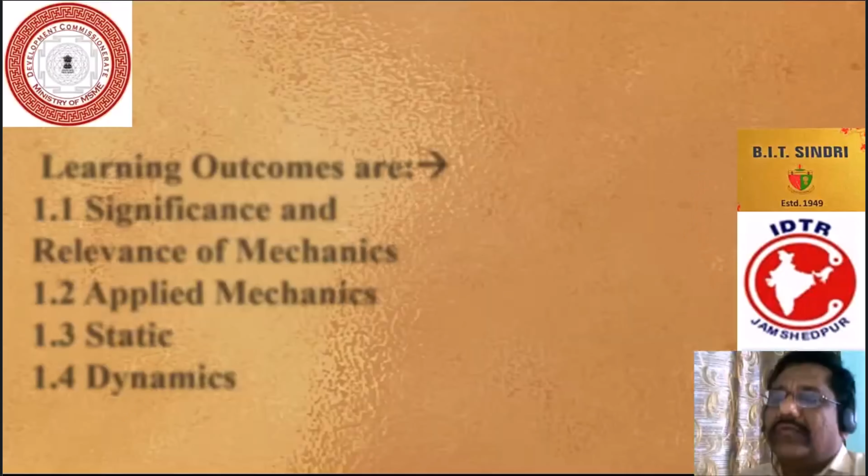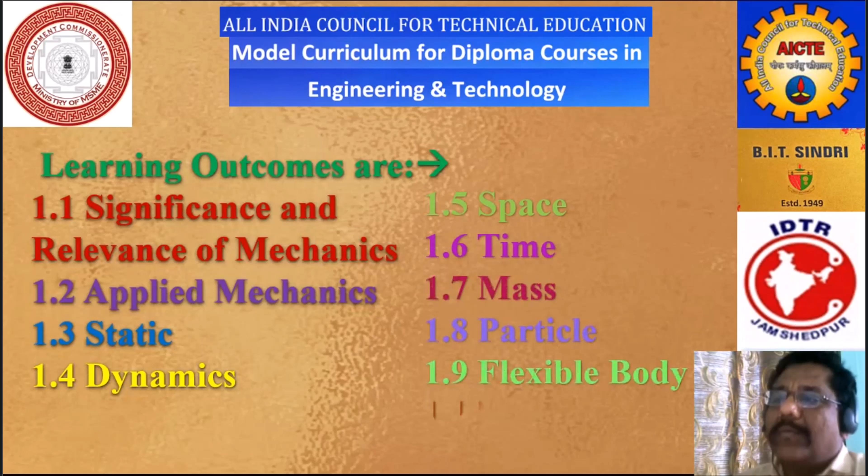The learning outcomes are significance and relevance of mechanics, applied mechanics, statics, dynamics, space, time, mass, particle, flexible body and rigid body. In these sections I will briefly discuss unit 1, basics of mechanics and force system.

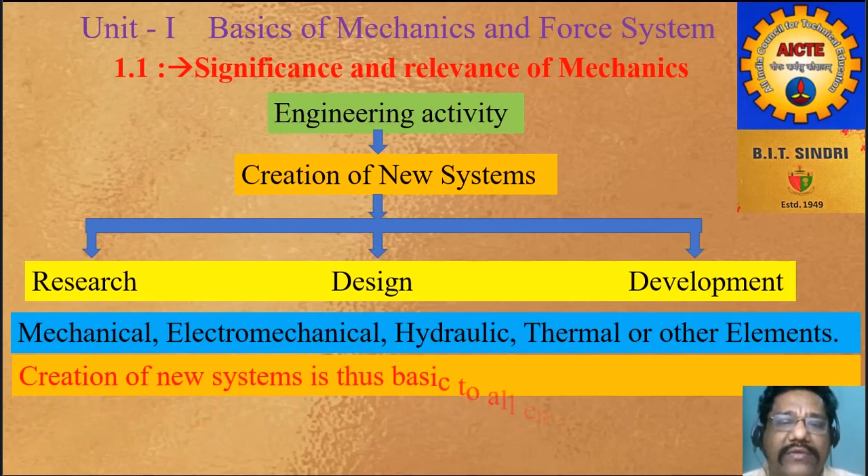The first topic is significance and relevance of mechanics. Engineering is an activity concerned with the creation of new systems for the benefit of mankind. The process of creativity proceeds by way of research, design and development. New systems emerge from innovation, and a system may be constituted by mechanical, electromechanical, hydraulic, thermal and other elements. Creation of new systems is thus basic to all engineering.

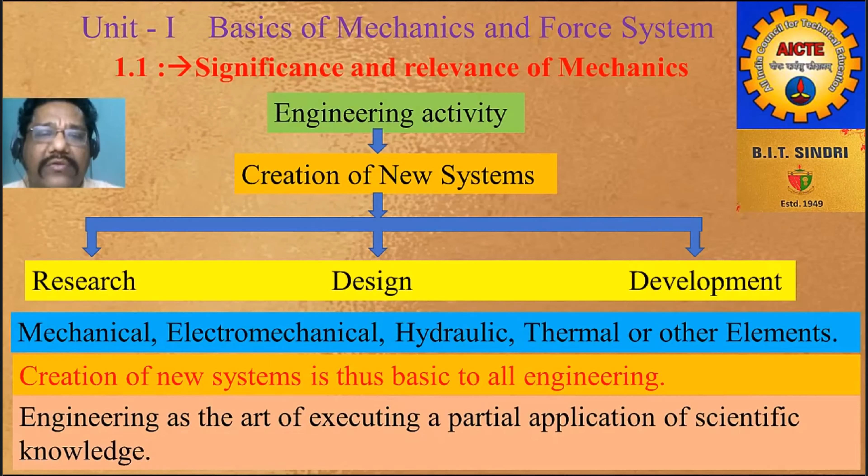The Living Webster Encyclopedic Dictionary defines engineering as the art of executing a practical application of scientific knowledge. It is important to understand the difference between engineering and science. Science is concerned with systematic understanding and gathering of facts, laws and principles governing natural phenomena. Engineering, on the other hand, is the art of utilizing established facts, laws and principles to create certain desired phenomena, as shown in figure 1.1.

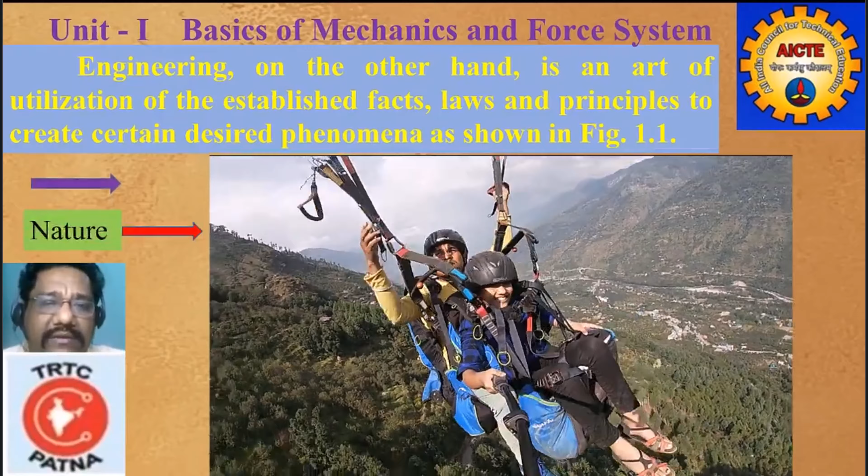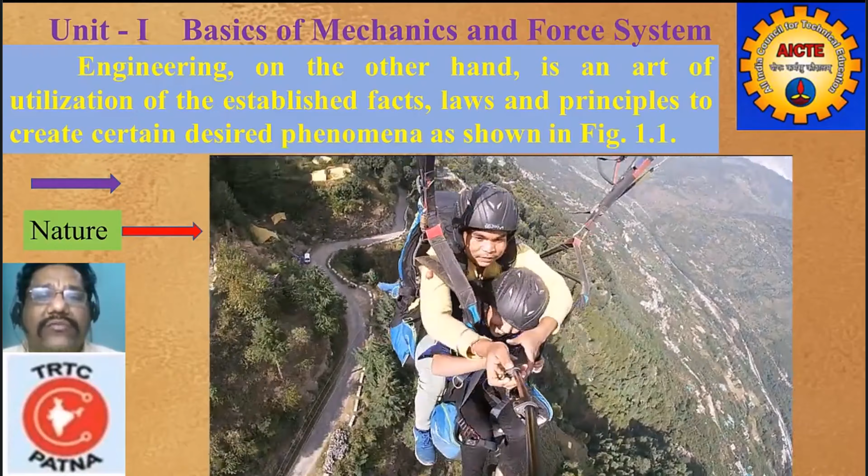So here is the role of engineering mechanics in nature. Now let's discuss the first point: what is nature? In some societies, there is no concept of nature, nor any concept of what is not nature. So whether in culture or society of humans, why do we need a concept of nature? When we grow a crop, do we deal with nature or something that is not nature?

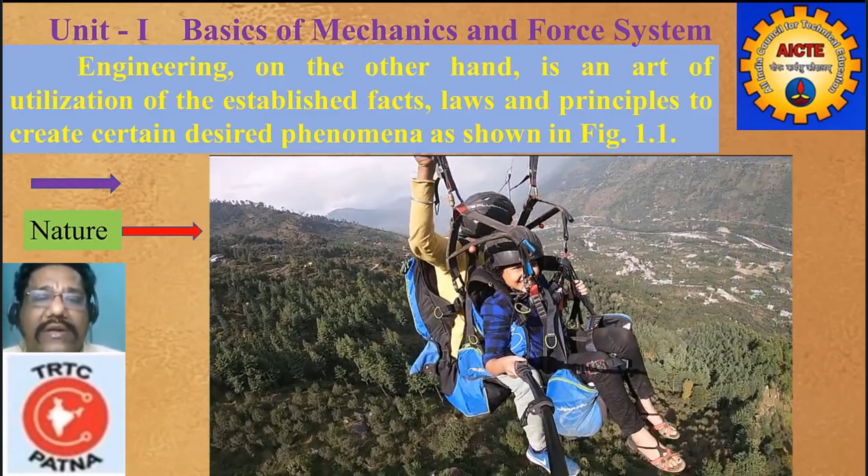Everything we do every day is a mixture of things that our school teachers told us are supposed to be separate. Our school teachers told us that behind all the different things human beings do, there is an unchanging background consisting of things like atoms, genes, and energy.

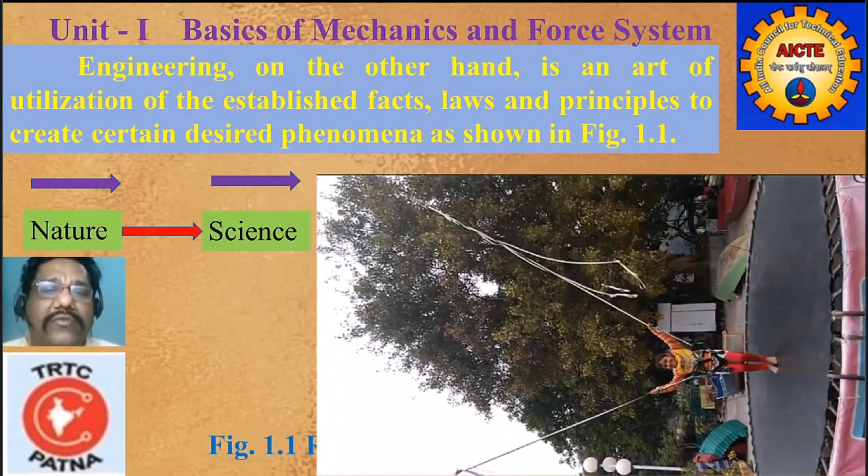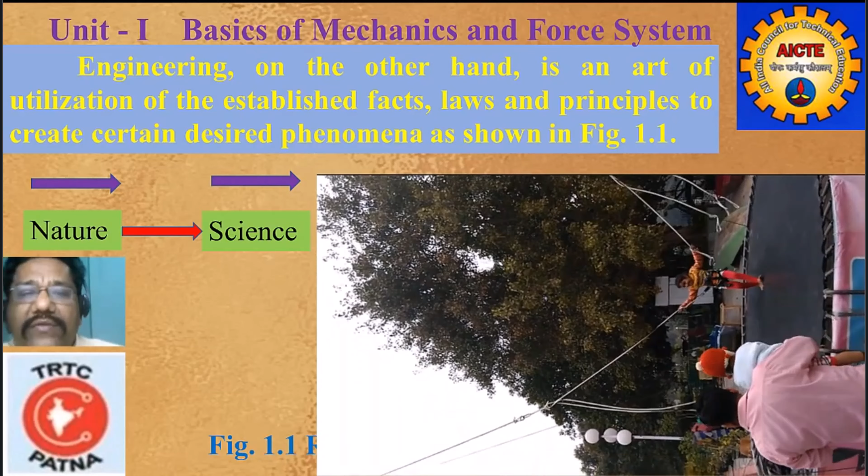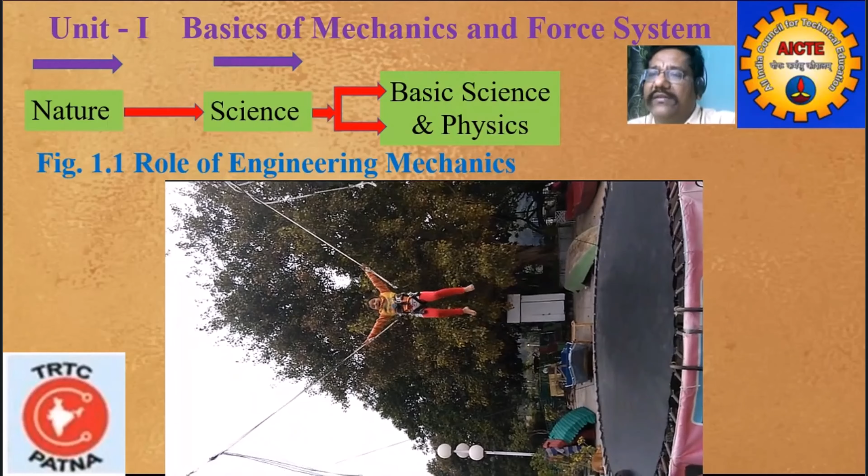Next is basic science and physics. Basic sciences are defined as the scientific disciplines of mathematics, physics, chemistry and biology. They are called basic sciences because they provide a fundamental understanding of natural phenomena and the processes by which natural resources transform. Physics is a natural science that deals with matter and energy and interactions of matter with one another. It also deals with all physical processes and phenomena of a particular system.

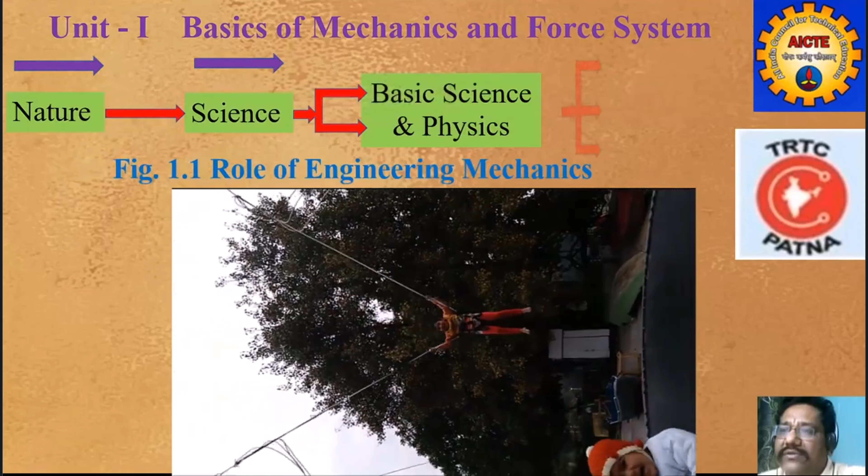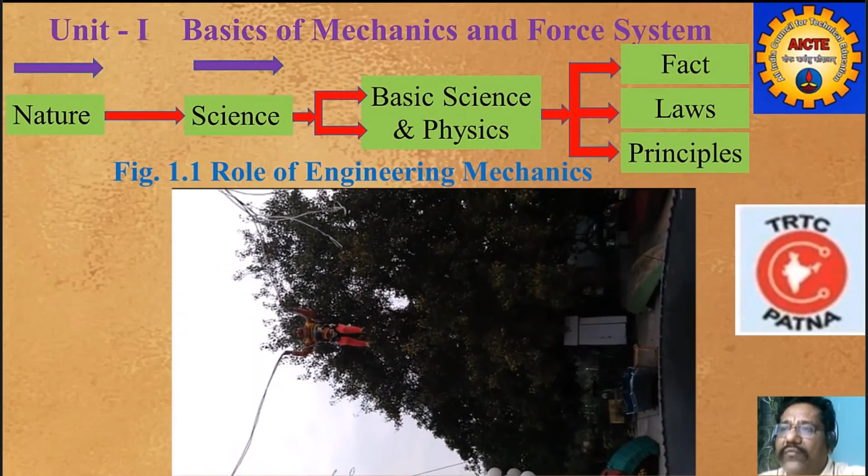Next is facts, laws and principles. What are facts? A fact in science is an observation that has been repeatedly confirmed and for all practical purposes is accepted as true. Truth in science, however, is never final, and what is accepted as a fact today may be modified or even discarded tomorrow. Laws are descriptive generalizations about how some aspect of the natural world behaves under stated circumstances.

Various laws you already studied in the school period, like Newton's laws of motion, law of conservation of energy, Hooke's law, etc. Now come to principles. Principles are ideas based on scientific rules and laws that are generally accepted by scientists. They are fundamental truths that are the foundation for other studies. They are more like guiding ideas that scientists use to make predictions and develop new laws. Various principles you already studied in the schooling period, like the equivalence principle, Archimedes' principle, etc.

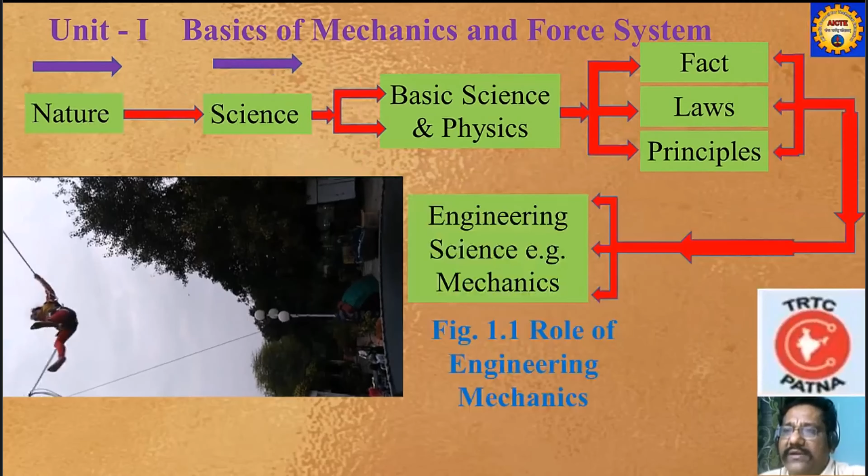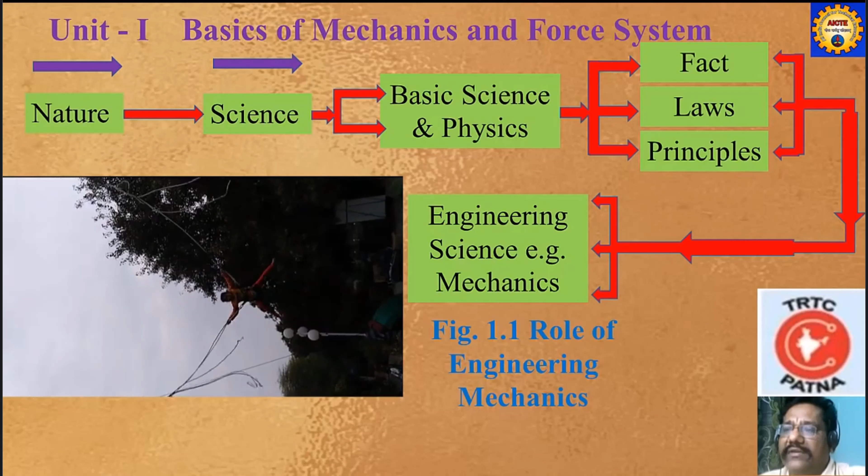The next term is engineering science, that is mechanics. Engineering science, mechanics, is a broad discipline that encompasses many different scientific principles and associated mathematics that underlie engineering. Mechanics is the study of forces that act on a body and the resultant motions that those bodies experience. So basically, you have to study the present-day form of engineering mechanics.

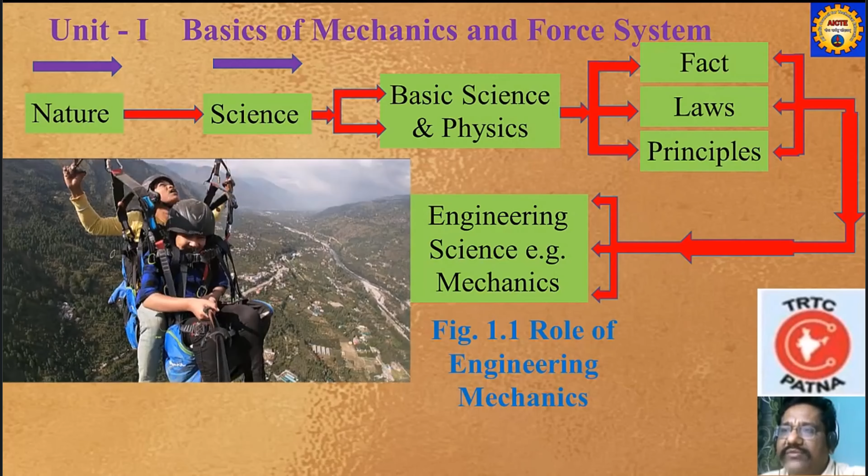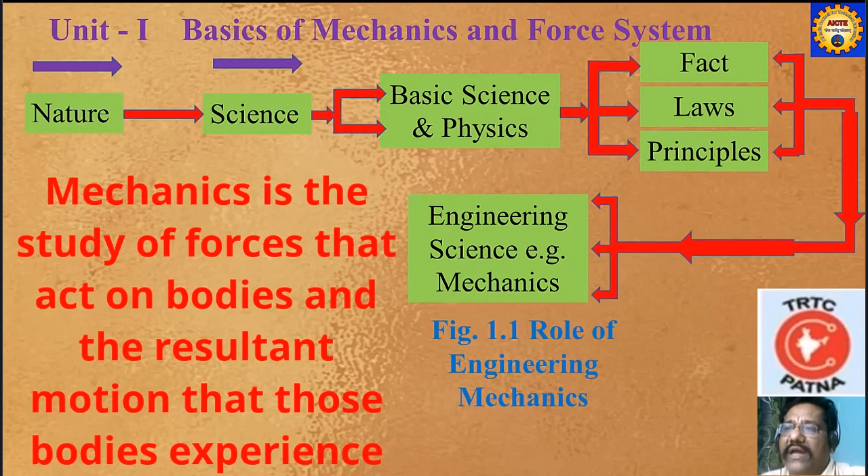So I will explain here what is engineering mechanics. Engineering mechanics is the study of forces that act on bodies and the resultant motions that those bodies experience.

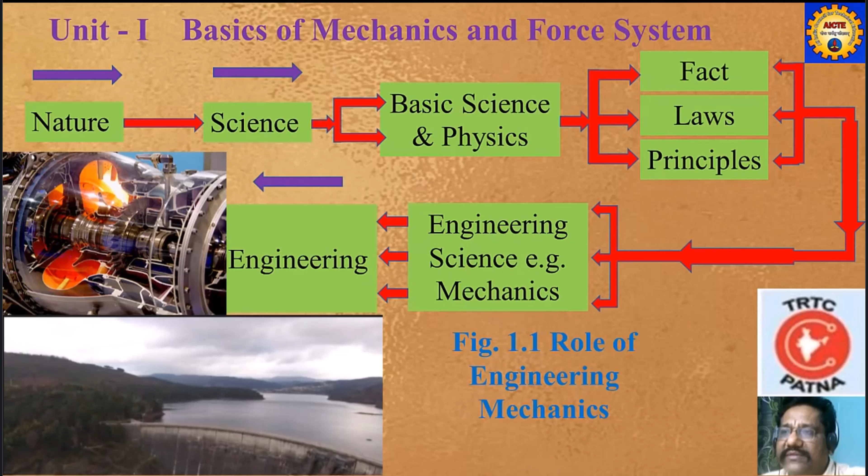The next term is engineering. Engineering is the use of scientific principles to design and build machines, structures and other items, including bridges, tunnels, roads, vehicles and buildings. The discipline of engineering encompasses a broad range of more specialized fields of engineering, each with a more specific emphasis on a particular area of applied mathematics, applied science and type of application.

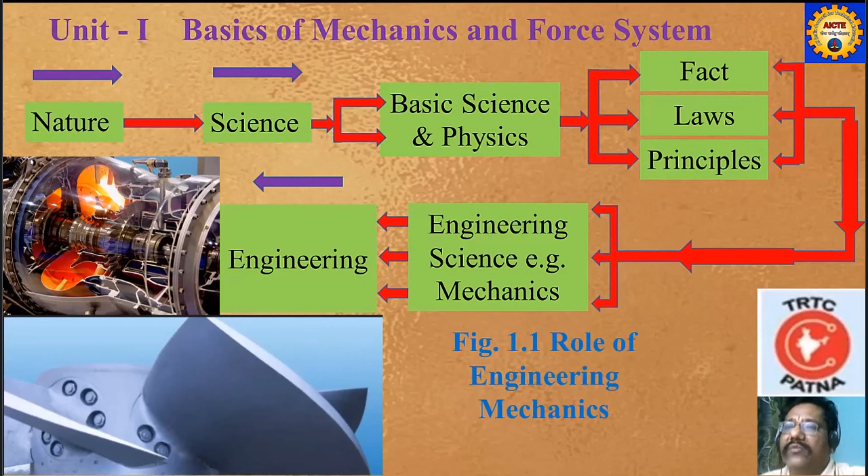So the role of engineering mechanics is: nature, then science, then basic science and physics, facts, laws, principles, engineering science and mechanics, engineering, and then after that, the new features developed here, the new systems.

The activities of science and engineering are thus mutually opposite. Both may proceed through similar ways and means of analysis and synthesis, but are oppositely directed. The training of scientists and engineers should be correspondingly designed for their respective objectives. The set of courses meant for engineering students is called engineering sciences. These are essentially basic sciences classified and labeled especially for engineering students with regard to their future responsibility. The existing laws and principles are conveyed to the students by the engineering mechanics course, with emphasis laid on their application to real life problems.

So mechanics is the physical science concerned with the dynamical behavior of material bodies in the presence of mechanical disturbance.

Since such behavior is of interest to mechanical, civil, electrical, chemical, aeronautical, textile, metallurgical, mechatronics and mining engineers, it is appropriate to conclude that the subject of mechanics lies at the core of all engineering analysis.

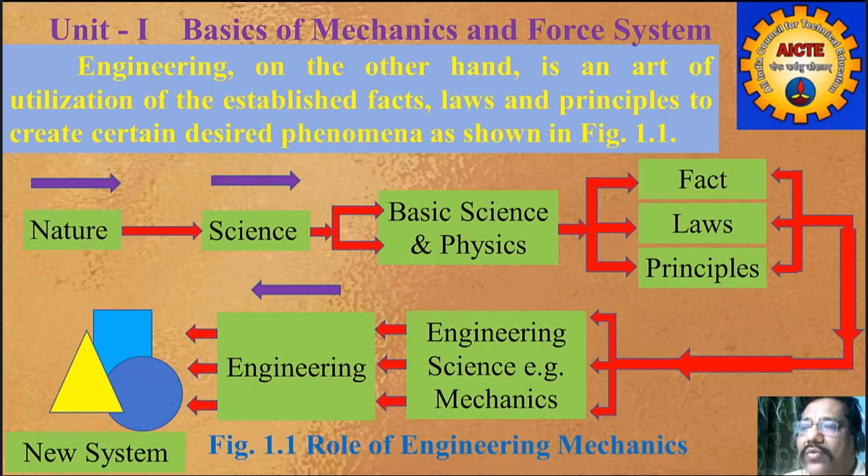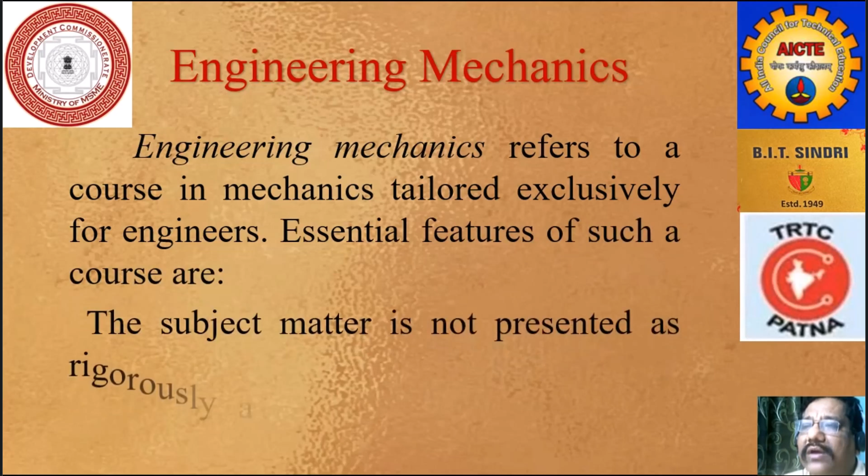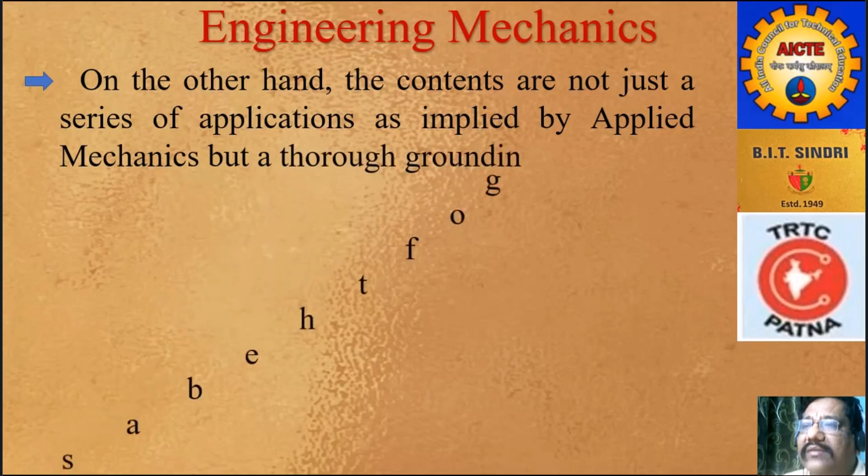Engineering mechanics refers to a course in mechanics tailored exclusively for engineers. Essential features for such a course: the subject matter is not presented as rigorously as analytical or axiomatic mechanics may demand. On the other hand, the contents are not just a series of applications as implied by applied mechanics, but a thorough grounding of the basic principles together with engineering application.

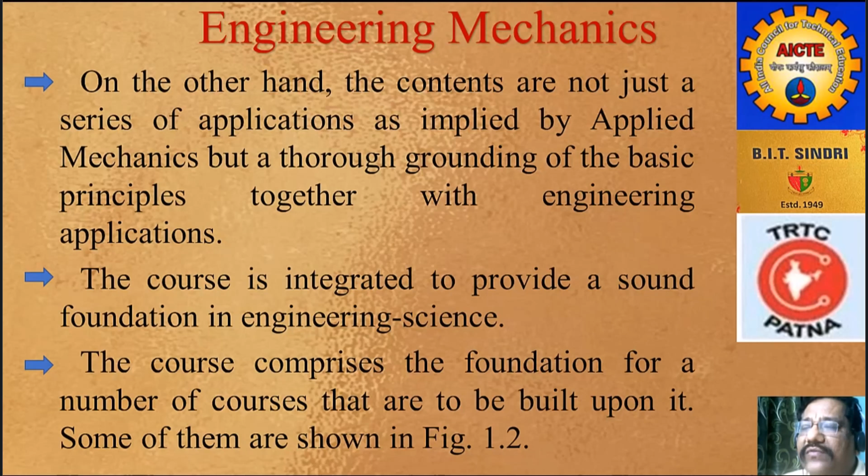The course is integrated to provide a sound foundation in engineering science. It comprises the foundations for a number of courses built upon it. Some of them are shown in figure 1.2. So here, mechanics is the foundation of a number of courses.

The foundation of engineering mechanics includes laws and principles, engineering, fluid mechanics, continuum mechanics, mechanics of solids, ideal fluids, viscous fluids, compressible flows, aeromechanics, viscoelastic fluid, mechanics of deformable bodies, particle mechanics, rigid body dynamics, and rigid body statics.

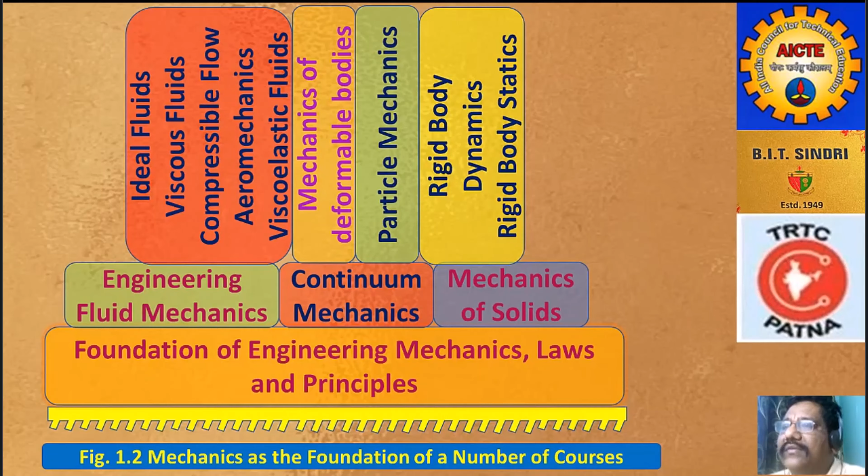After the completion of significance and relevance of mechanics, the next topic is applied mechanics. Applied mechanics is the branch of science concerned with the motion of any substances that can be experienced or perceived by humans without the help of instruments. In short, when mechanics concepts surpass being theoretical and are applied and executed, general mechanics becomes applied mechanics.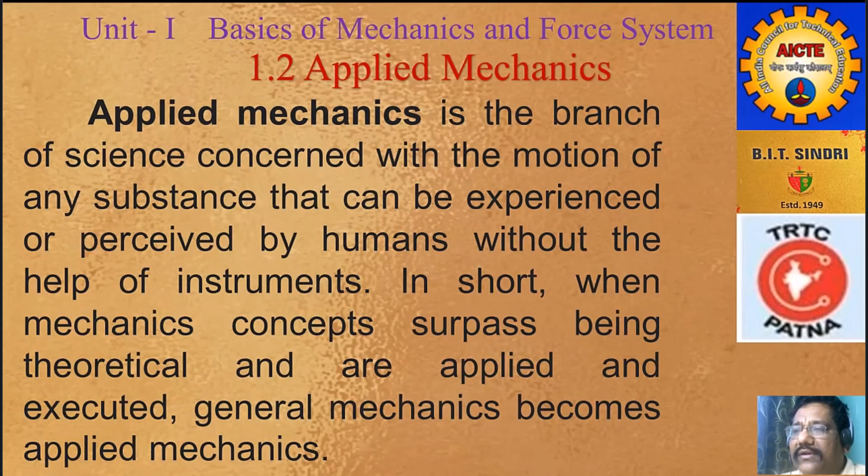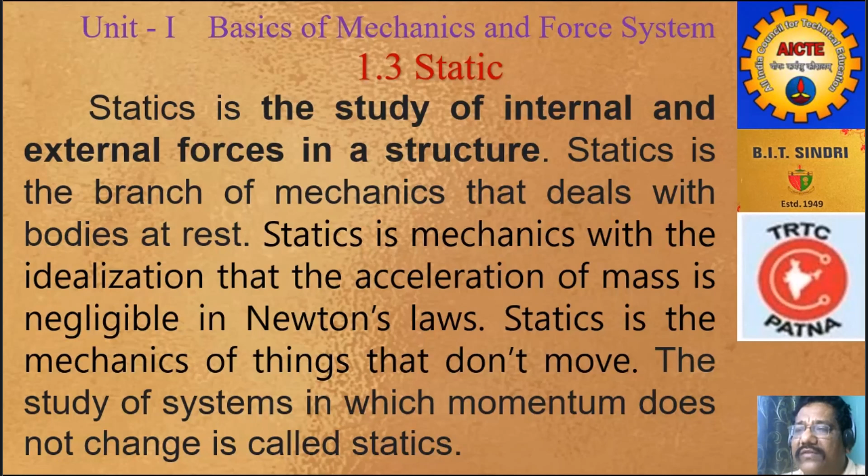The next topic is statics. Statics is the study of internal and external forces in a structure. It is the branch of mechanics that deals with bodies at rest, with the idealization that the acceleration of mass is negligible in Newton's law. Statics is the mechanics of things that don't move — the study of systems in which momentum does not change.

The other topic is dynamics. Dynamics is the part of mechanics that studies movements and its causes — the study of the causes of motion and change in motion. Dynamics is the study of how moving objects behave, and of force and motion of bodies. The vector equation force equals mass into acceleration introduces the concept of motion and time derivatives of mechanics.

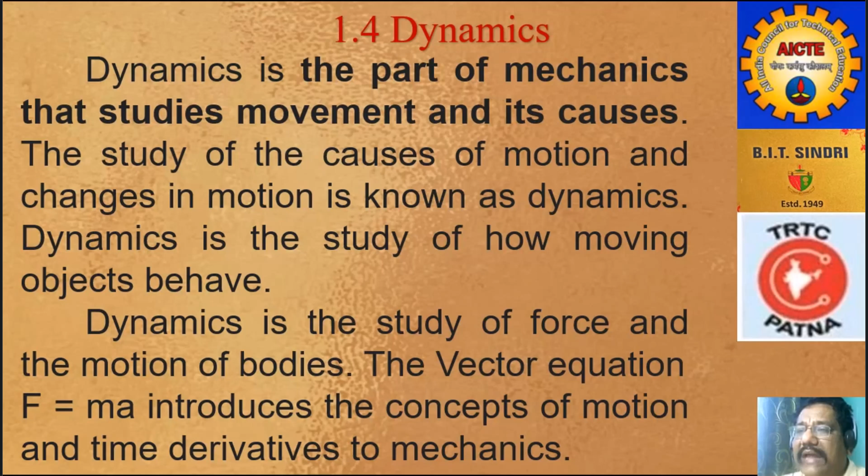The next topic is space. Any geometric region in which the study of a body is done is called a space — the geometric region occupied by bodies whose positions are described by linear or angular measurement relative to a specific coordinate system. For a three-dimensional problem, three independent coordinates are needed; for a two-dimensional problem, only two coordinates are required.

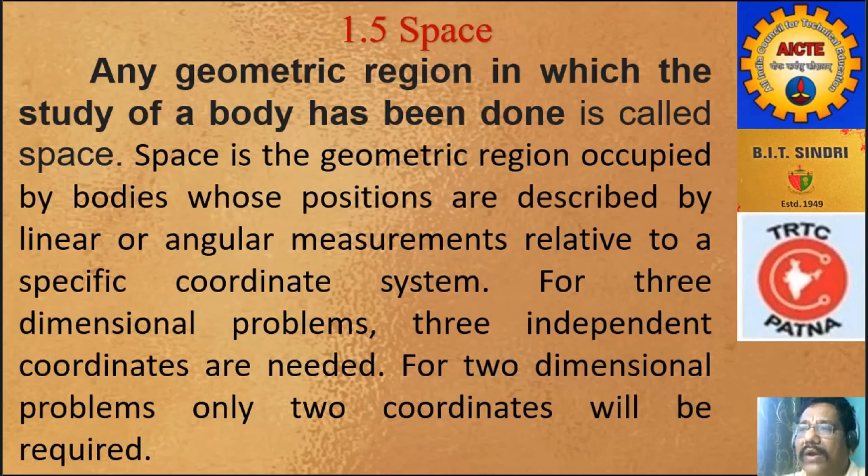The other topic is time. Time is a concept for measuring the succession and duration of events. Time is not directly involved in the analysis of problems in statics.

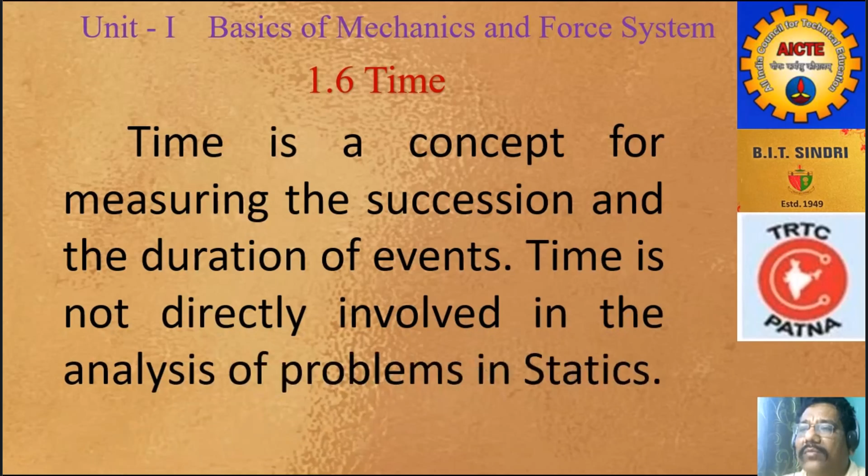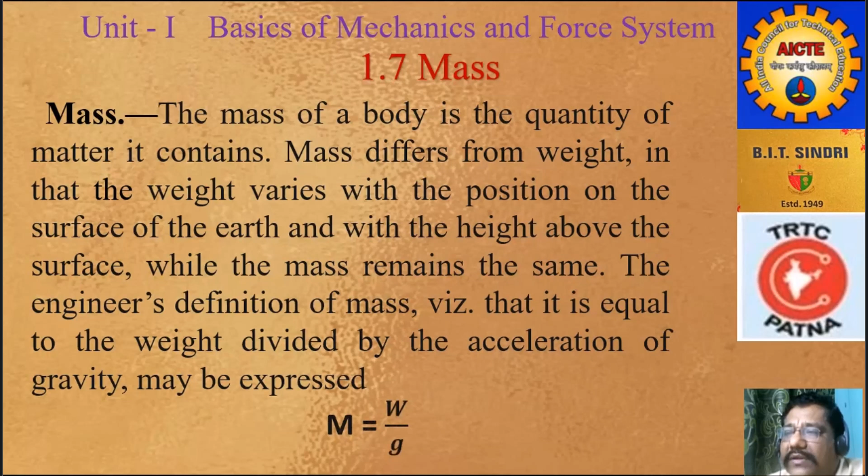Another topic is mass. The mass of a body is the quantity of matter it contains. Mass differs from weight in that weight varies with position on the surface of the earth and with height above the surface, while mass remains the same. The engineer's definition of mass, equal to weight divided by the acceleration of gravity, is expressed as M equals W by G. Both W and G vary for different localities, but the quantity M is constant — that is, the quantity of matter in a body is independent of its position with reference to the earth.

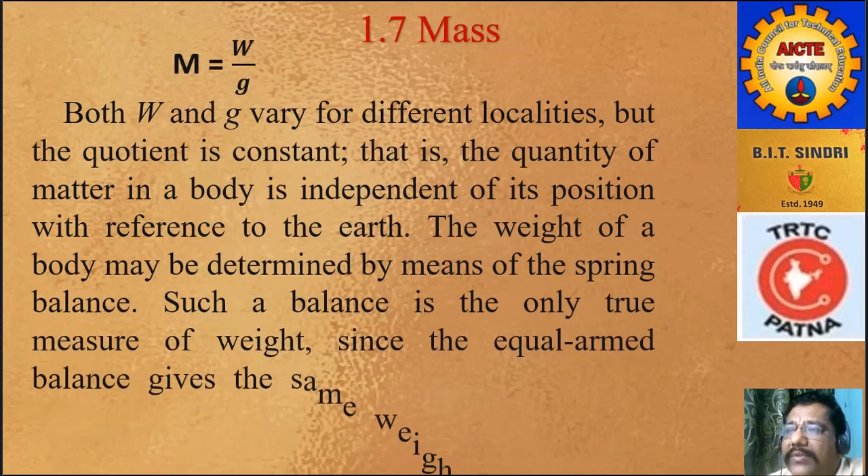The weight of a body may be determined by means of the spring balance. Such a balance is the only true measure of weight, since the equal arm balance gives the same weight regardless of distance from the center of the earth — the equal arm balance really measures mass.

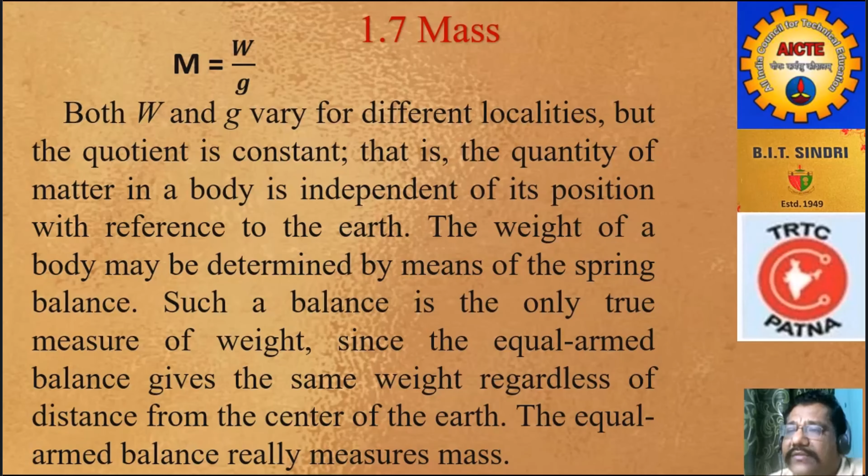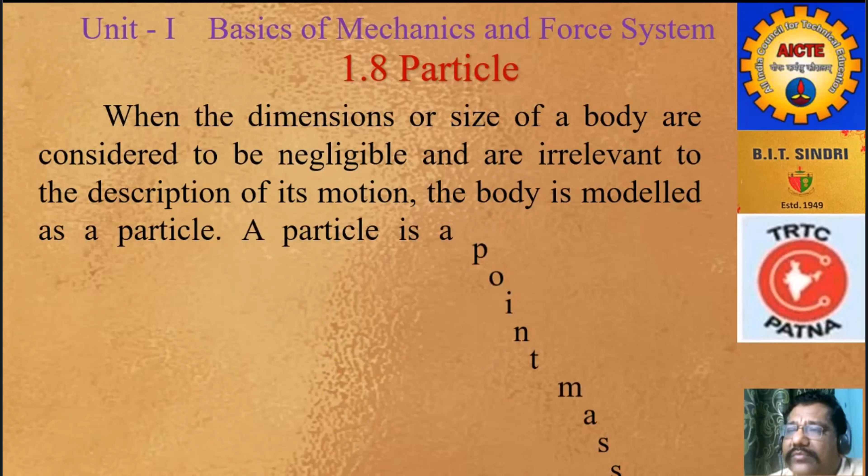The other term is particles. When the size of a body is considered negligible and irrelevant to the description of its motion, the body is modeled as a particle — a point mass or material point in the abstract sense. A body is represented as a particle if its dimensions are small compared to the coordinates describing its motion, as shown in figure 1.3.

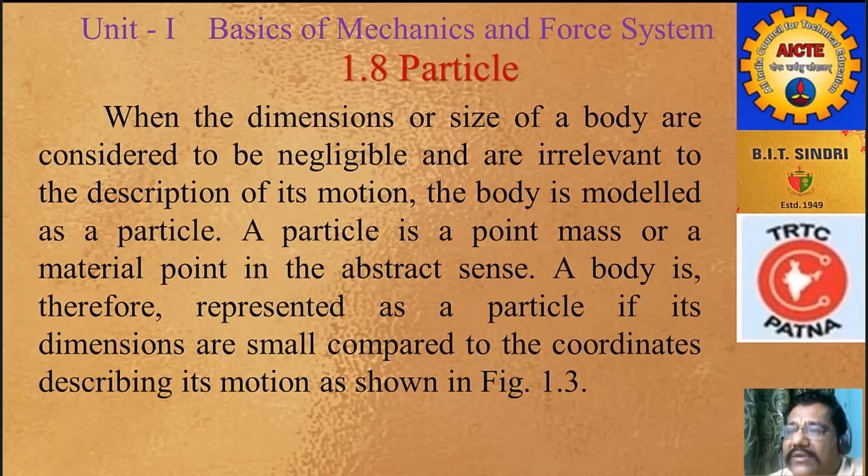Examples: a cricket ball as viewed by a spectator, a distant aeroplane tracked by a ground observer, a satellite orbiting the earth as seen by an observer on the earth, and a planet as seen from another planet.

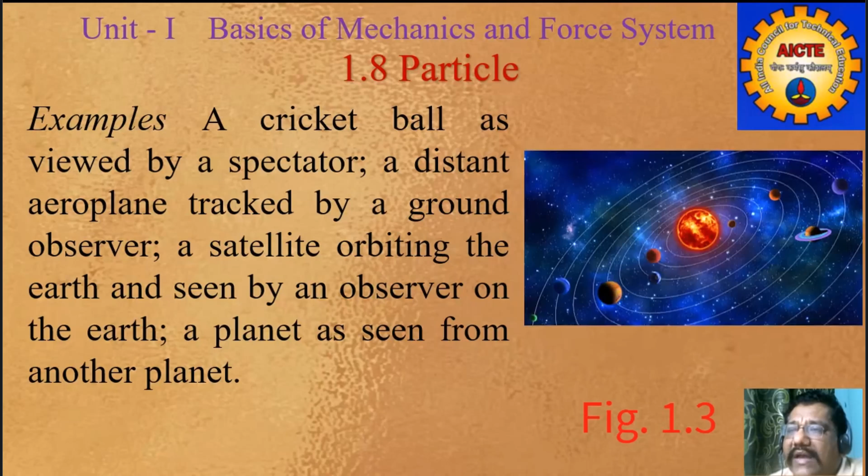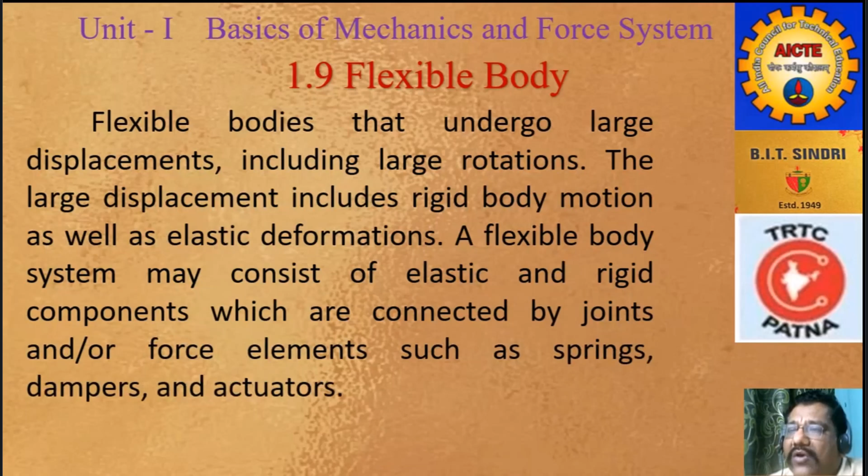The other topic is the flexible body — one that undergoes large displacement including large rotations. The large displacement includes rigid body motion as well as elastic deformation. A flexible body system may consist of elastic and rigid components connected by joints and/or force elements such as a spring, damper and actuators.

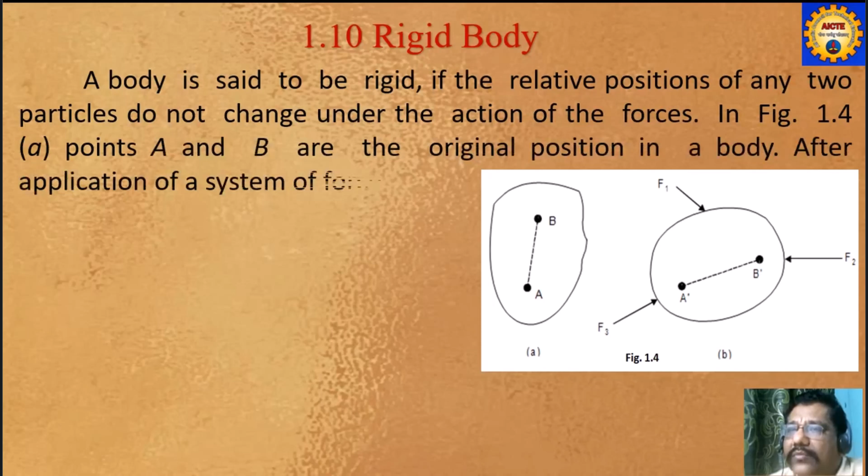Then comes the rigid body. A rigid body is said to be rigid if the relative positions of any two particles do not change under the action of forces. In figure 1.4, point A and point B are the original positions in a body. After application of a system of forces F1, F2, F3, the body takes the positions shown in figure 1.4b.

A' and B' are the new positions of A and B. If the body is treated as rigid, the relative positions of A'B' and AB are the same, that is A'B' equals AB. So many engineering problems can be solved satisfactorily by assuming bodies are rigid.